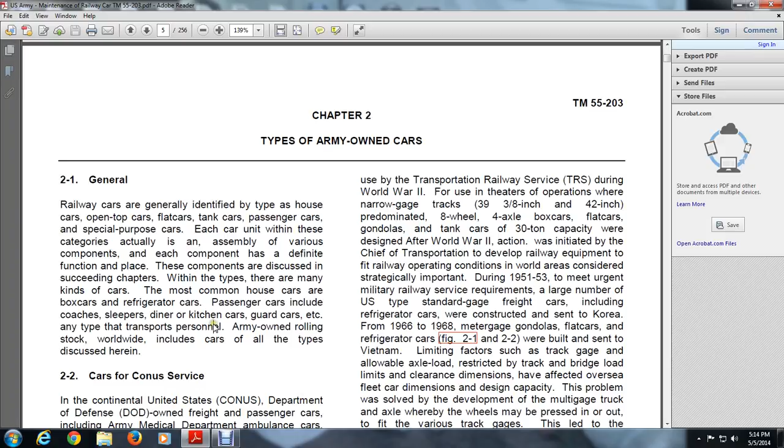Army-owned rolling stock worldwide includes cars of all the types discussed here. 2.2 Cars for CONUS Service in the continental United States. CONUS, the Department of Defense owned freight and passenger cars, including Army Medical Department ambulance cars, troop kitchen cars, and guard cars, are constructed in conformance with Association of American Railroads (AAR) and Department of Transportation specifications for ready movement into interchange service. The major portion of DoD-owned cars in CONUS consist of heavy duty flat cars and tanker fleets. Use and movement of these cars is controlled by the Military Traffic Management Terminal Services, MTMTS.

2-3 Cars overseas: freight cars in foreign countries. Low capacities of 15 to 20 tons, four-wheel, two-axle cars were standard during World War II. A shortage of available shipping and the necessity of saving shipping space brought about and hurried the design of knockdown cars patterned after European designs. These included 40-ton flat cars, box cars, and general gondolas.

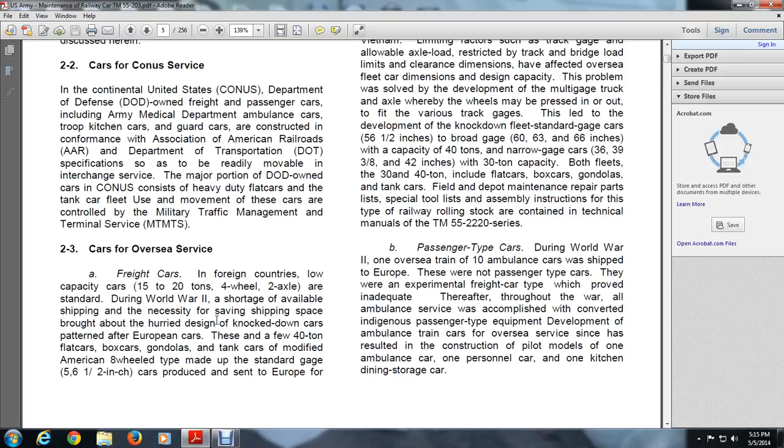For use in theaters of operation, narrow gauge tracks of 39 and 3/8 of an inch and 42 inches predominated, with 8-wheel, 4-axle box cars, flat cars, and gondolas. Tanker cars of 30-ton capacity were designed after World War II, initiated by the Chief of Transportation to develop railway equipment fitting the railway operation conditions in world areas considered strategically important during 1951 and 1953, to meet urgent military railway service requirements.

A large number of U.S. type standard gauge freight cars, including freight refrigerator cars, were constructed and sent to Korea from 1966 to 1968. Meter gauge gondola flat cars and refrigerator cars, figures 2-1 and 2-2, were built and sent into Vietnam.

Limiting factors of track gauge, allowable axle load, restricted track and bridge load limits, and clearance dimensions have affected operations overseas, and this was solved by developing a multi-gauge truck with an axle whereby the wheels may be pressed in or out to various track gauges.

This led to the development of knockdown fleet standard gauge cars of 56 and a half inches and broad gauge cars of 60, 63, and 66 inches with a capacity of 40 tons, plus narrow gauge cars of 36, 39 and 3/8 of an inch, and 42 inches with 30-ton capacity. Both the 30-ton and 40-ton fleets include flat cars, box cars, gondolas, and tanker cars.

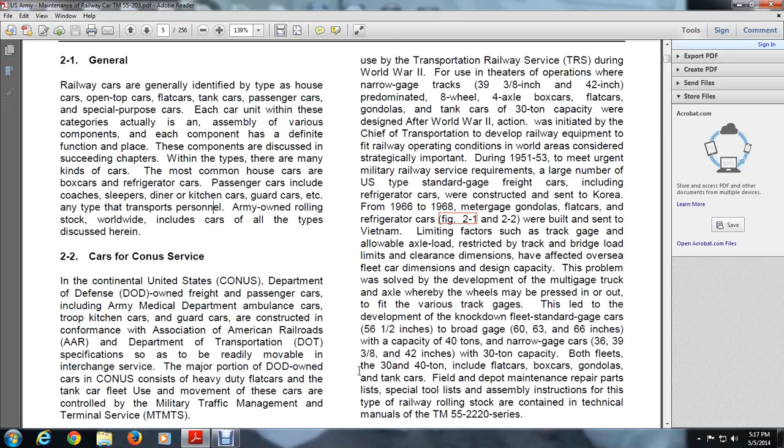Field depot maintenance, repair parts, and special tools are listed, and assembly instructions for these types of railway rolling stock are contained within technical manuals of the TM 55-2220 series.

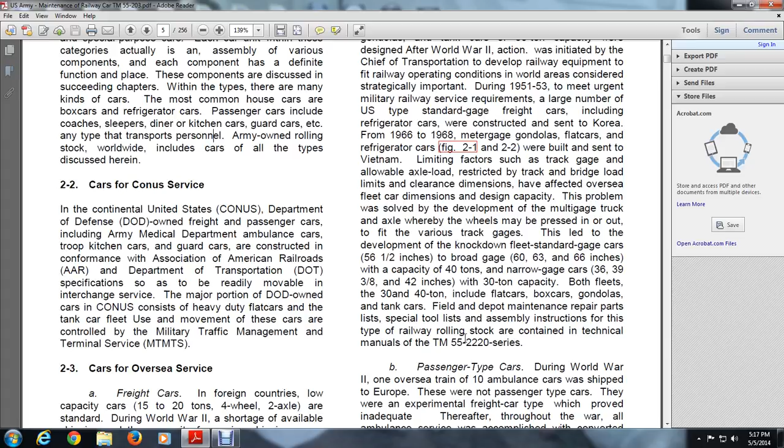All ambulance services were accomplished and converted to indigenous passenger type equipment, leading to development of ambulance train cars for overseas use. This resulted in constructing pilot models of the ambulance car, one personnel car, and one kitchen/dining/storage car.

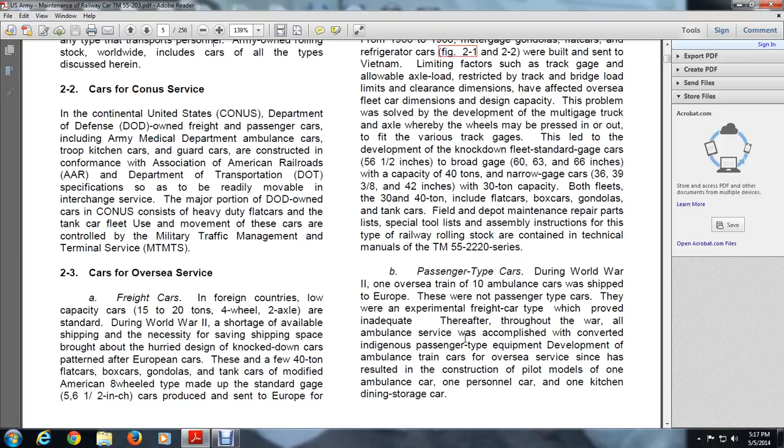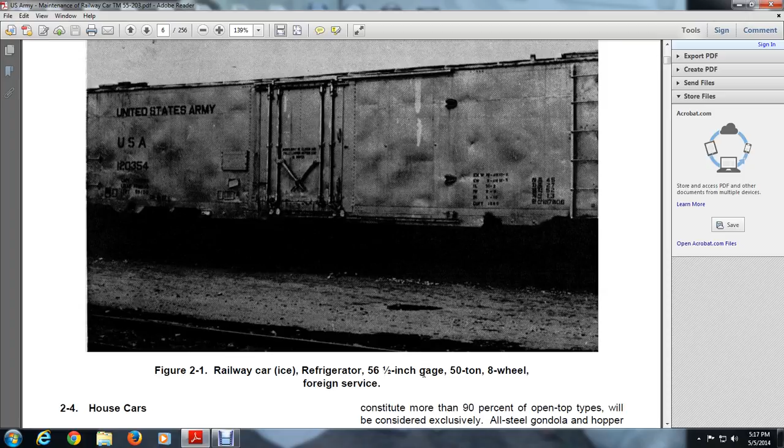2-4 House cars. In general, a house car is a car with an enclosed superstructure with sides, ends, and a roof, and which is provided with doors, vents, ladders, and running boards. A house car is built on a conventional underframe and has conventional running gear.

Figures 2-1 and 2-2 illustrate the exterior of foreign service refrigerator cars. An interior view is shown in figure 2-3.

For overseas usage, only 3 types of house cars will be used: box cars, refrigerator cars, and cabooses or guard cars. The major characteristics of these types are discussed, with only limited coverage given to miscellaneous types. 2-5 The open top cars.

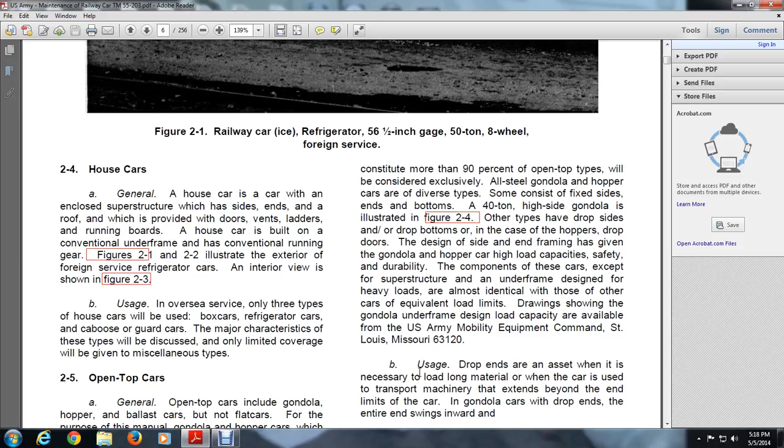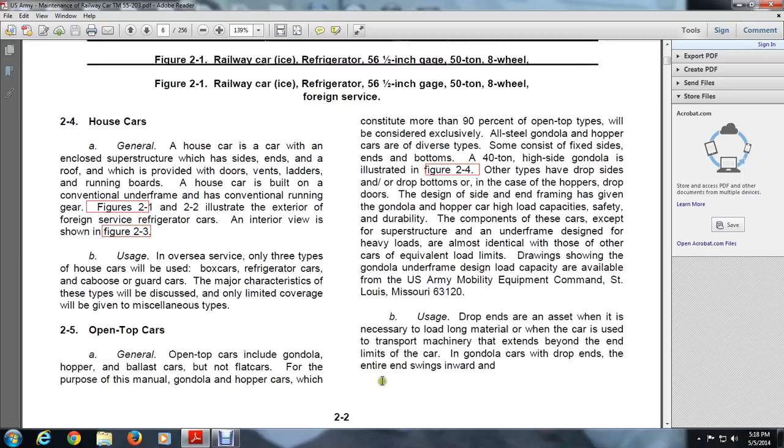General open top cars include gondolas, hopper, ballast cars, but not flat cars. Gondola and hopper cars, which constitute more than 90% of the open types, will be considered exclusively; steel gondola and hopper cars are of diverse types, consisting of fixed sides, ends, and bottoms, such as the 40-ton high side heighted gondola illustrated in Figure 2-4.

Other types have drop sides and drop bottoms, or in the case of hoppers, drop doors. Special design consideration has been given to gondola and hopper cars for high load capacity, safety, and durability. The components of the car, except for the superstructure and underframe designed for heavy loads, are almost identical to those of other cars.

Equivalent load limits are drawings showing the gondola underframe design load capabilities available from the U.S. Army Mobility Equipment Command in St. Louis, Missouri 63120. Usage: drop ends are an asset when it is necessary to load long material when the car is used in transportation of machinery that extends beyond the end limits of the car.

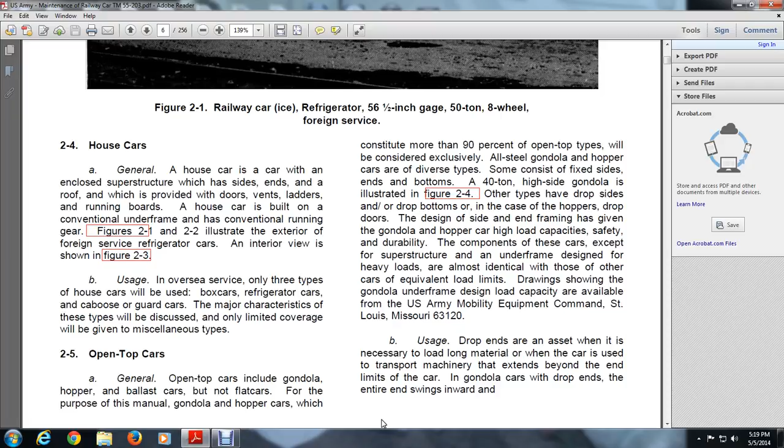The gondola's drop end swings inward and lies flat on the deck of the car. Locking devices connect the end to the fixed sides of the car, with interlocking features designed to prevent spreading of the car sides at the corners.

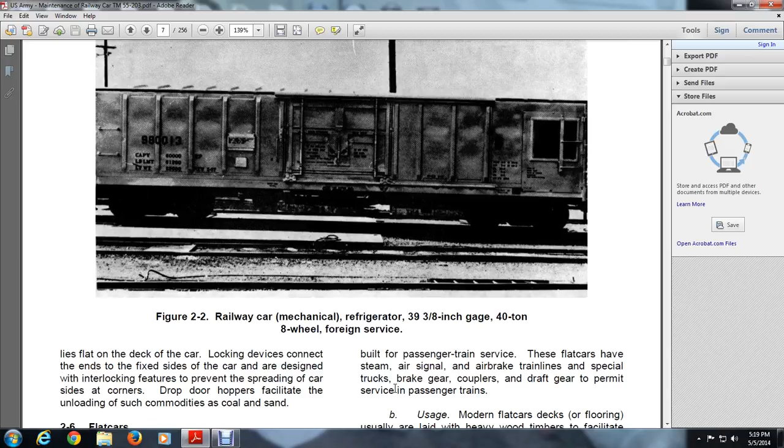Drop door hoppers facilitate unloading of commodities like coal and sand. In Figure 2-2, you see the railway mechanical refrigerator car, 39 3/8 inch gauge, 40-ton, 8-wheel, foreign service.

Section 2-6, flat cars: a general flat car with a wooden and steel build over the underframe, but without a superstructure, with load capabilities of 40 to 250 tons. The flat car is considered the workhorse of railway service: draft gear, couplers, and safety appliances.

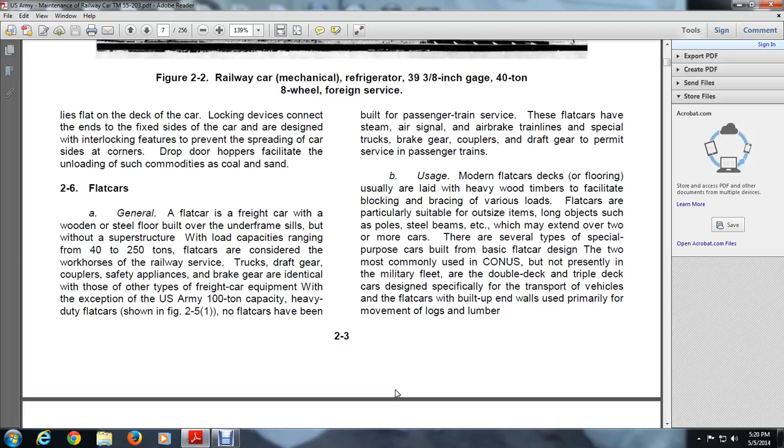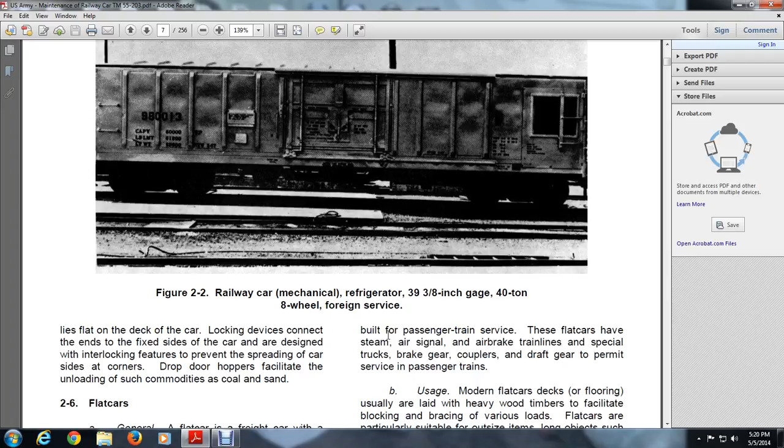Brake gear is identical to those types of freight car equipment, with the exception of U.S. Army 100-ton capacity heavy duty flat cars shown in Figure 2-5. No flat cars have been built for passenger trains, but some flat cars have steam, air signal, air brake, and train line systems.

Special trucks, brake gear, couplers, and draft gears permit services in passenger type operations. The usage of major flat cars: decks and flooring usually are laid on heavy wood timbers to facilitate blocking, bracing, and various loads. Flat cars are particularly suitable for oversize items, long objects such as poles and steel beams, which extend over two or more cars.

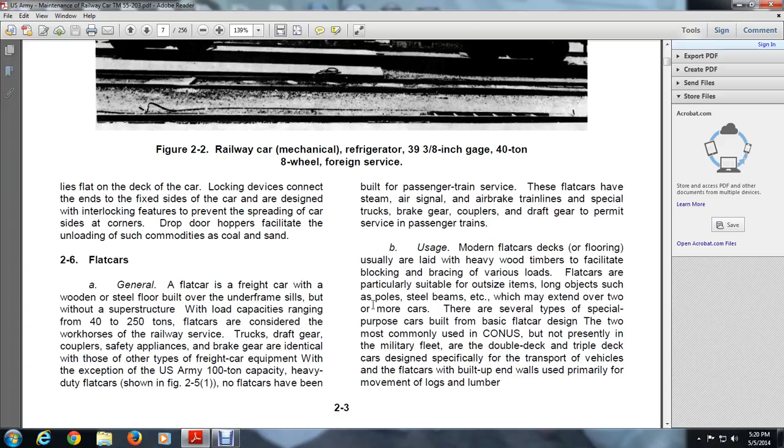There are several special purpose designs based on the basic flat car. The two most commonly used, but not presently in the military fleet, are the double deck and triple deck cars designed especially for the transport of vehicles. Other flat cars are built up with end walls primarily for movement of logs and lumber.

Here you see the interior view of the railway ice car refrigerator, 56.5-inch gauge, by 50-ton wheel, 8-wheel, foreign service.

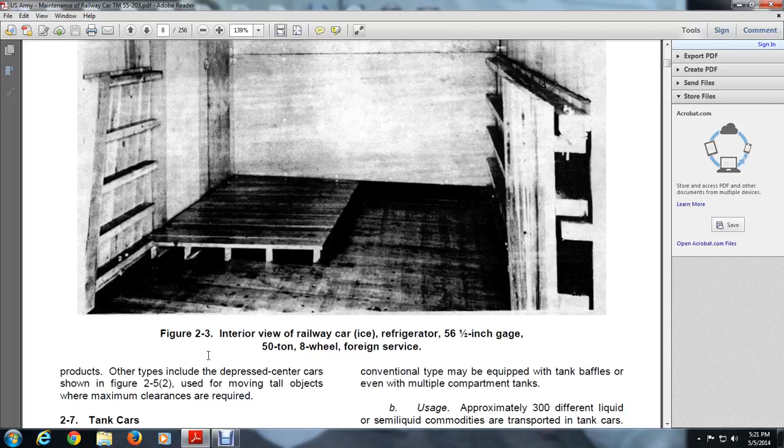Other types include depressed-center cars, shown in Figure 2-5, used for moving tall objects where maximum clearance is required. Section 2-7, tanker cars: except for the superstructure and tank, the modified underframe of tanker cars is similar to those of other types of cars.

Tanker car underframes are designed and built without load bearing side sills between the bolsters; the weight of the tank superstructure rests on the center sills, with the bolsters serving as the main anchorage and bearing point. The conventional tanker car, Figure 2-6, consists of a tank, usually steel, mounted on a special underframe.

The draft gear, couplers, brake gear, and trucks are similar to those of other cars and of the same load design. Ordinary tank cars have a single compartment tank equipped with dome safety valves and bottom outlets. Conventional type cars may be equipped with tank baffles, and even multi-compartment tanks.

Usage: approximately 300 different liquid and semi-liquid commodities are transported in tanker cars. These products include crude oil, fuel oil, lubrication oil, gasoline, kerosene, alcohols, acids, alkalis, coal tar products, chlorine, bleach, insecticides, fungicides, animal, vegetable, and fish oils, fruit juices, milk, paint, varnishes, lacquers, and compressed gases.

In addition to the conventional tanker car, there are special types such as removable tanker cars and wooden tanker cars. These have anchorage features different from conventional single tank cars, and special purpose tanker cars have little to no military application. Only conventional tanker cars will be discussed in this manual.

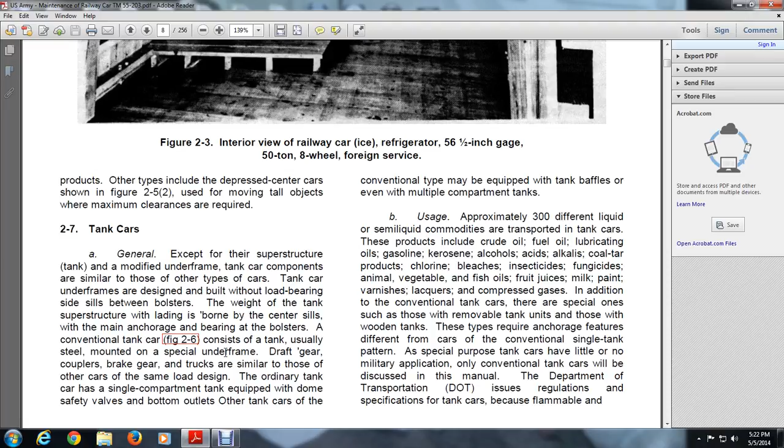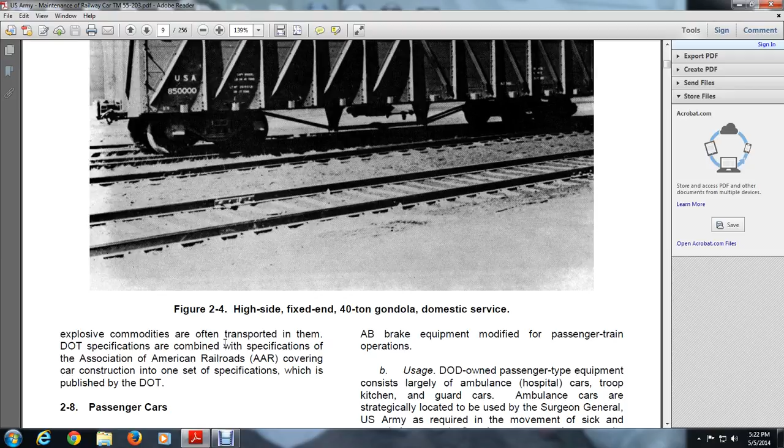The Department of Transportation issues regulation specifications for tanker cars because of the flammable and explosive commodities often transported in them. The DOT specifications combine with the specifications of the Association of American Railroads, covering construction into one set of specifications published by DOT. In Figure 2-4, you see a high side, fixed end, 40-ton gondola, domestic service.

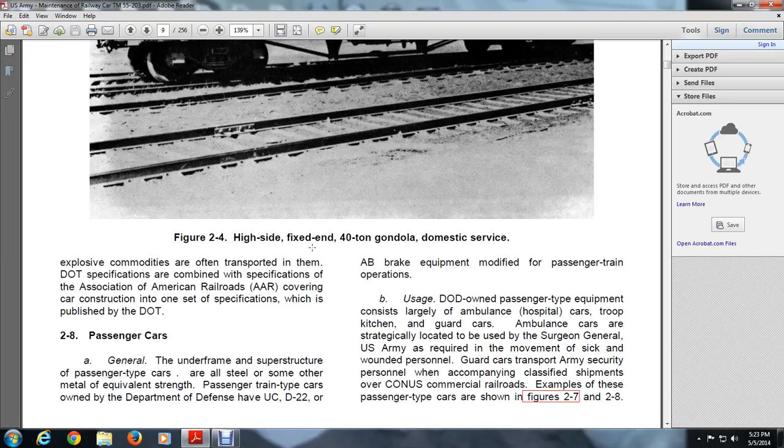Domestic gondola, domestic service. Section 2-8, passenger cars: general underframe and superstructure passenger type cars of steel or other metal of equivalent strength, owned by the Department of Defense.

The passenger type cars owned by the Department of Defense are UC, D-22, or AB, brake equipped, modified for passenger train operation used in the DoD. Passenger type equipment consists largely of ambulance cars, hospital cars, troop kitchens, and gondola guard cars.

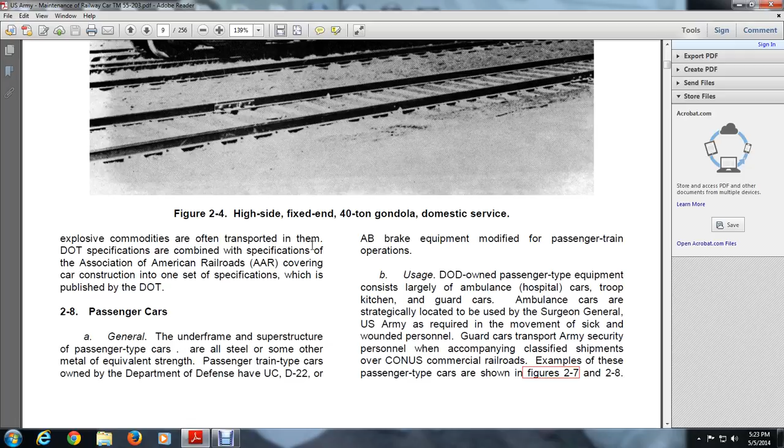Ambulance cars are strategically located by the Surgeon General of the Army, required for the movement of sick and wounded personnel. Guards transport Army security personnel accompanying classified shipments over commercial railroads. Examples of these passenger type cars are shown in figures 2-7 and 2-8.

Here is a 100-ton heavy-duty flat car.

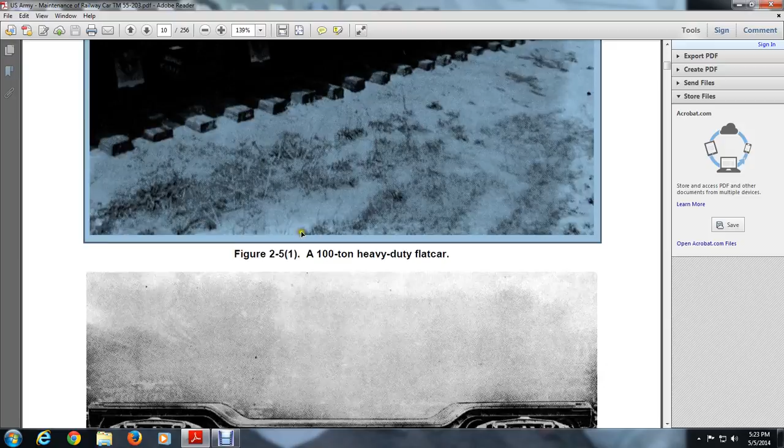This one is a depressed center car, also known as a non-fish belly type.

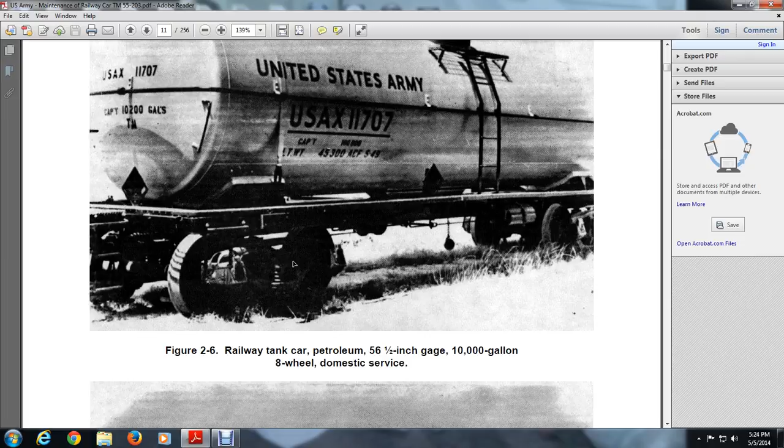This is a railway tanker car, 56.5-inch gauge, 10,000 gallon, 8-wheel, domestic service.

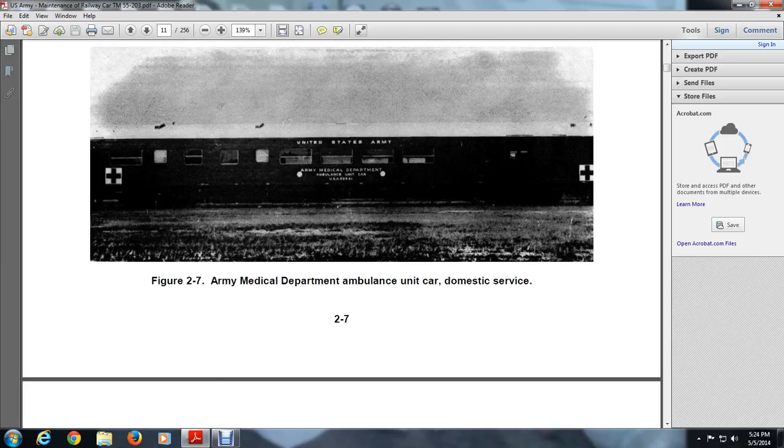Here is an Army Medical Department unit, or ambulance unit car, domestic service. U.S. Army guard car.

Section 2.8, under Part 2, Rolling Stock. Chapter 3, Basic Components.